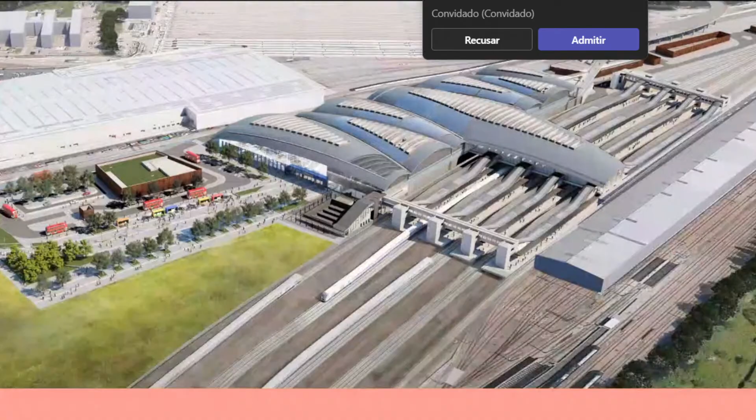So these are the topics that I'm going to be covering today. I'm going to do a brief introduction about myself, my academic background, and my career. I'm going to talk a bit about WSP, the company I've been working for the past year and a half, and then we're going to look into HS2 as a whole, the HS2 project within the United Kingdom, and then we're going to focus more particularly on the project that I've been working on, HS2 Old Oak Common. The two main aspects we're going to talk about within the project are the structural design—how we've completed the design, which is not complete, it's like 99% complete at the moment.

We're still finishing up the design, but it's pretty much there and we're already building it. The second point is the construction of this great project, which is already on site, and it's something I've been following with my work on a weekly basis.

And then at the end we're going to have a Q&A session. So if anybody has any questions, I would ask them to maybe write them down on a piece of paper and then ask me at the end of the presentation.

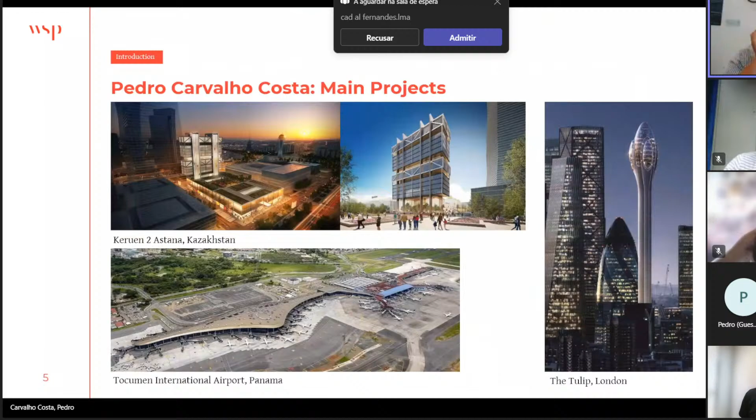So these are just some of the projects I've worked on in the past. I can't show you all of them because some are still confidential and some are still being constructed, so I cannot share pictures for contractual reasons, but these are the ones that I can.

So my first project was a project in Kazakhstan, in Astana. It was a shopping mall with an office tower with quite interesting design features. First of all, the office tower with hanging composite floors from the top of the concrete core, and also you can see in the image on the top left there's a garden on top of the shopping mall.

The loads we had to consider to design the shopping mall were quite substantial, and there were some interesting features like precast and post-tension concrete as well. But the biggest challenge on this project was the temperature design, because Astana is the second capital in the world with the largest temperature range. So we had to account for those temperatures. That was quite an interesting project.

My second project was Tocumen International Airport, a very, very long structure in a seismic area. That was quite a different challenge from the first one, but probably one of the projects I liked most to work on, and I've learned a lot on this one.

The last one I can show you from my period at Foster & Partners was the Tulip, which I made a presentation about with Forum Civil a couple of years ago. It's not going to be built because the government vetoed its construction, for sustainability reasons. I can't comment on that, but what I can say is that from a structural point of view, it was quite an interesting project to work on.

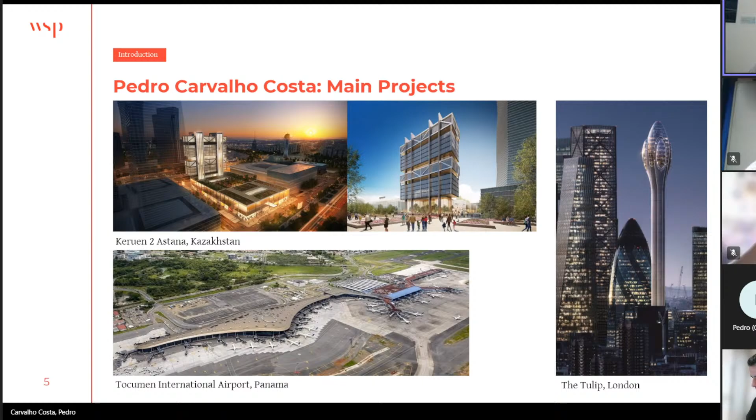But that's enough about me. Let's move forward. So WSP is the company I'm working for at the moment.

WSP is one of the leading engineering consultancies around the world. We work in all sorts of fields related to engineering - airports, buildings, landscape architecture, transportation, infrastructure, all sorts of things you can think of in the built environment. In terms of the UK business, we're divided into 5 different departments: planning advisory, transport infrastructure, strategic advisory, property and buildings, and water energy.

In the last few years, due to the transition to net zero, the most important one I'd like to highlight here is property and buildings, because that's where I work. Although in my current project, since it's a railway project, it's kind of a joint venture between property and buildings and transport and infrastructure, so we work with some members from that department as well.

Some of WSP's projects in the last few years include the Shard, which you might be aware of - the tallest building in London. Other projects include the Zayed National Museum, quite an interesting structure, which I've put here purposefully because I actually worked on this project very briefly when I was still at Foster's. That was actually my first direct contact with WSP from a professional standpoint.

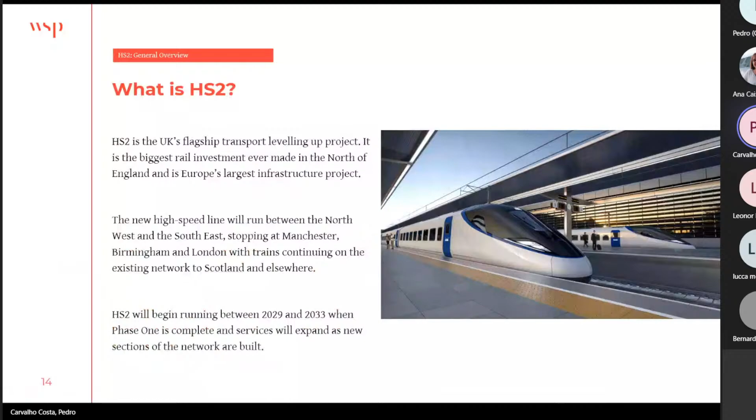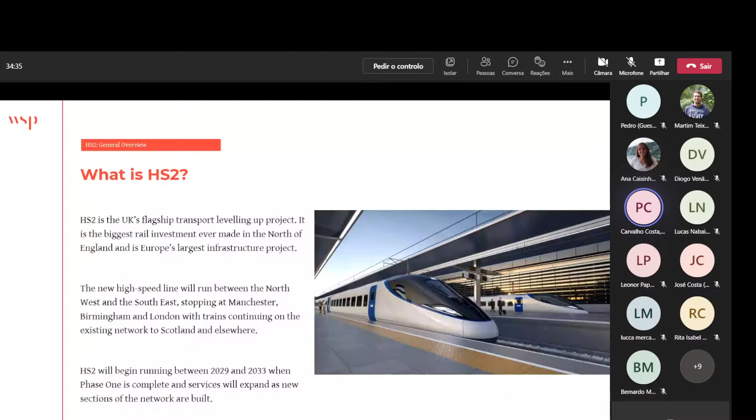It's a new high-speed line that will run between the North West and the South East of the country, connecting major UK cities like Manchester, Birmingham, and London. Its connection to the other railway networks in the UK will allow passengers to travel further afield to Scotland, Wales, and other places in the country.

The services from HS2 are currently expected to start running between 2029 and 2033, and that's when phase 1, the initial stage of the project, is meant to be concluded.

The project as a whole is divided into different stages. We've got phase 1, which is the connection between London, Birmingham, and the West Midlands—the Midlands being an area of England between the north and south, kind of the center of England. Then phase 2A is an extension of that line further afield to Crewe, which is sort of halfway between Birmingham and Manchester. Manchester is where phase 2B of High Speed 2 will be concluded.

Then there is HS2 East, which includes a connection to the east part of the Midlands, with potential future services to Yorkshire, Leeds, and other cities around that area. And then we've got the connection to the Northern Powerhouse Rail, which will allow connections of the HS2 services to the north of the country, to Scotland, and further afield.

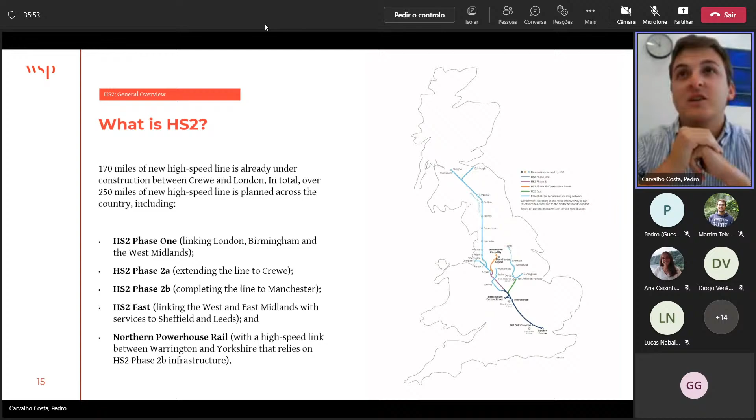So in total, it's going to be around 250 miles of new high-speed line.

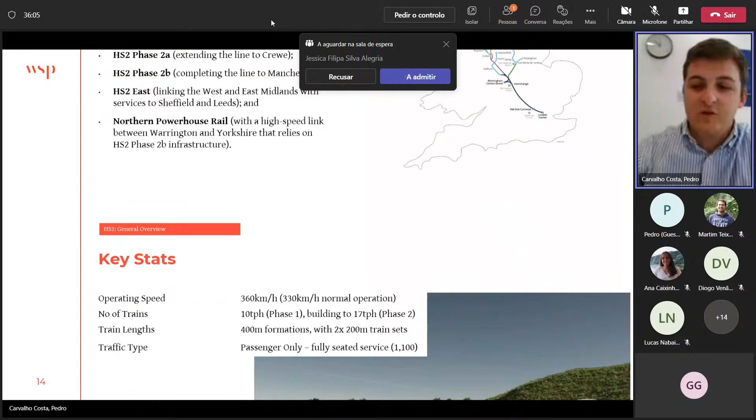In terms of some key stats of the project, the operating speed of trains will be about 360 kilometers per hour. Just to give you an idea, normal trains run at about 230 kilometers per hour—so it's almost double the speed. That's why it's high speed.

In terms of trains per hour, phase 1 of the project has been designed to have 10 trains per hour, so that's roughly 1 train every 6 minutes, and that number is going to be bumped up to 17 trains per hour, almost double, on phase 2.

In terms of train lengths, we're talking about trains that are 400 meters long, which can be divided into 2 sets of trains, with the front bits of the train separating if necessary. This is something that actually happens a lot in the UK—a train does part of a journey, and when it reaches a certain station, the train divides into 2, and the halves separate. So that's something that may happen on HS2, and it's been covered in the design.

In terms of traffic type, we're talking about passenger only, so there's not going to be any freight or goods being transported on this train. It's only going to be passenger trains.

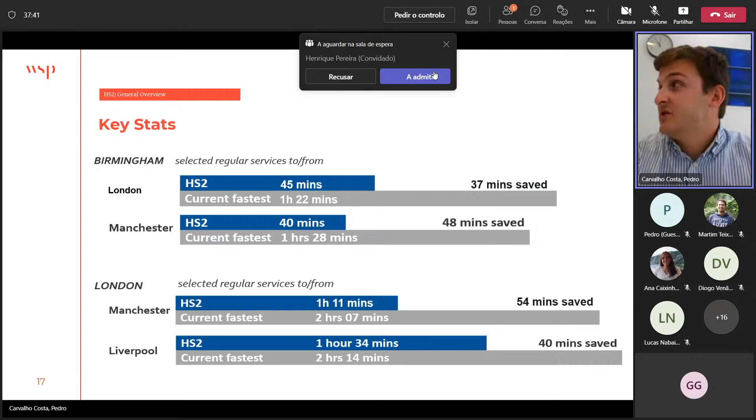In terms of times, that's obviously the first benefit people think of straight away when you talk about high-speed rail. That's very important, but it's not the only benefit from HS2, and it might not even be the biggest one in my personal opinion—however, it's important to talk about it. You can see on screen that we're basically halving the distances between London and Birmingham, and Birmingham and Manchester. The savings are very considerable, and having those major UK cities connected with the length of time shortened is going to allow people to, for example, commute between these cities, which will be very beneficial to the country as a whole.

In the United Kingdom, what tends to happen—similar to what happens a bit in Portugal—is all the services and economic activities are centered in the capital, London, the same way it happens in Lisbon. One of the ideas behind HS2 is that we're going to level up and boost the economy elsewhere in the country.

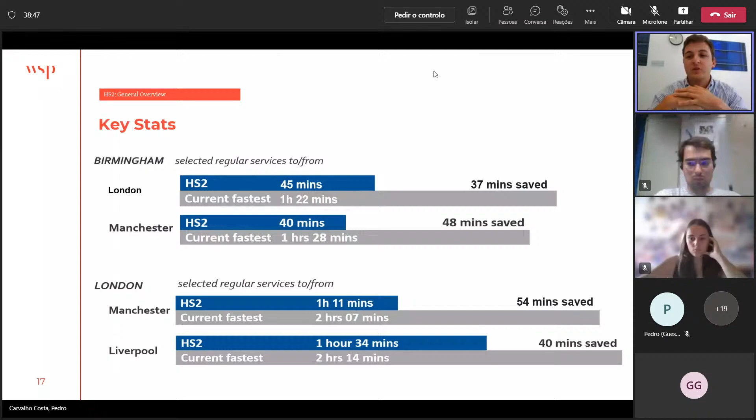By having good connections, good infrastructure and public transport connections between these cities in the UK, we're going to help other cities develop further and have economic growth as well. So, as I said, this is the immediate first benefit of HS2, connecting these two cities, but in my view there's a greater one.

It's not just about traveling fast, but also about releasing infrastructure for other services. At the moment we have trains running from London to Birmingham, and those trains are occupying space on the current infrastructure. If we're able to move those services away and put them on a different line, a high-speed line that provides a better service for people traveling between those two cities, then we're going to have spare capacity on the original network.

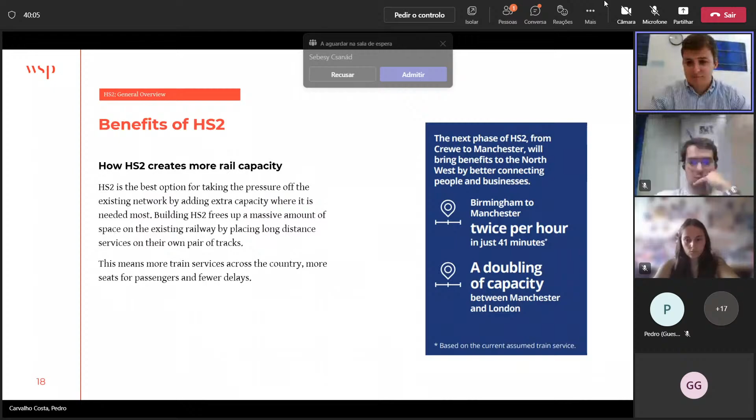That will allow for the creation of further normal railway services in those areas. So cities and little towns between London and Birmingham will be able to have more railway services. There's a boost in terms of public transport, and that's going to eventually generate economic growth, benefiting those cities and towns because they will have much better connections and other benefits as well. So, in my view, that's actually one of the main advantages of HS2.

Obviously all this connectivity will generate growth, and as I said a few slides ago, it's going to help level up the country, boosting the economy of these local cities and towns, which will all of a sudden have more services and be more interconnected with other parts of the United Kingdom.

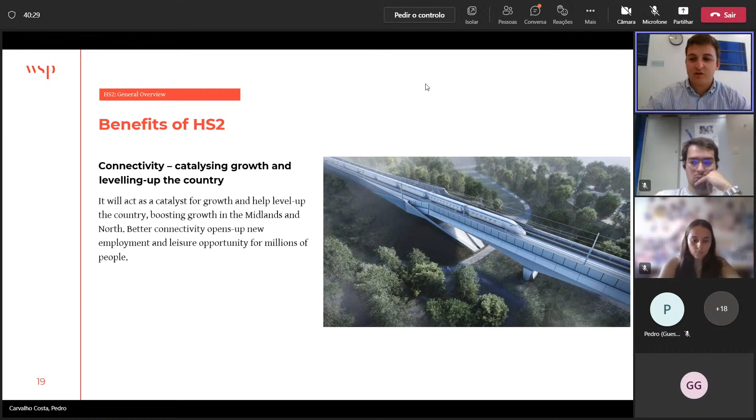And while we're building this massive infrastructure project, the net zero transition is on our mind. It's one of our main goals for this project. All our carbon emissions will be offset. We're planning to have net zero construction and operation from 2035.

One thing already happening at construction sites across the United Kingdom is that we're planning to have sites running diesel-free. For example, usually the cranes on site are operated by diesel, but at Old Oak Common we're already not using diesel-operated cranes, they're electrical. So there's a big push from WSP and HS2 to make this project as environmentally friendly as possible.

And obviously, last but not least, this is going to be a boost for the British economy because it's a massive infrastructure project, and it's going to need a lot of people to work on it. There's going to be lots of need for suppliers. We're talking about the creation of 27,000 jobs, directly or indirectly related to HS2.

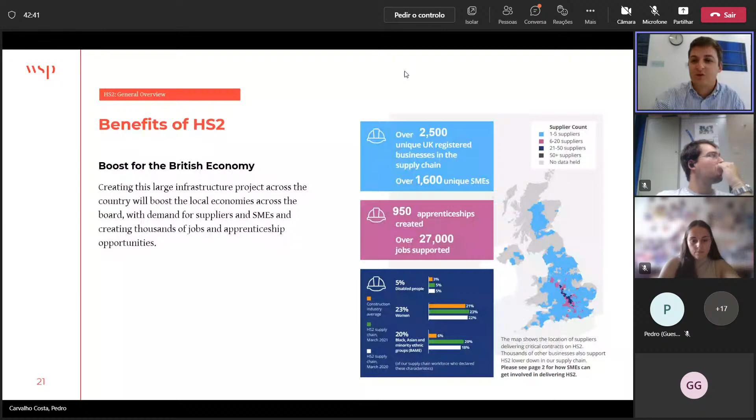You can see on the map that the concentration of suppliers is much larger along the length of the project, where you have the HS2 line. But you can also see there are suppliers all across the country benefiting from this project, even in places like Scotland. So that's also going to help level up the country by generating more economic activity in different areas, not just in London.

So I think that's pretty much it for HS2 from a macro point of view. Let's look now more into a micro point of view, into HS2 Old Oak Common.

Old Oak Common is going to be one of the two London stations of HS2, and it's going to be part of HS2 until London Euston is completed. Old Oak Common will be the terminus of the high-speed line. London Euston is a bit more complicated project because it's an expansion of an existing station with some retrofit, and it's in the city center, so it's a bit more complicated and will only be completed further afield.

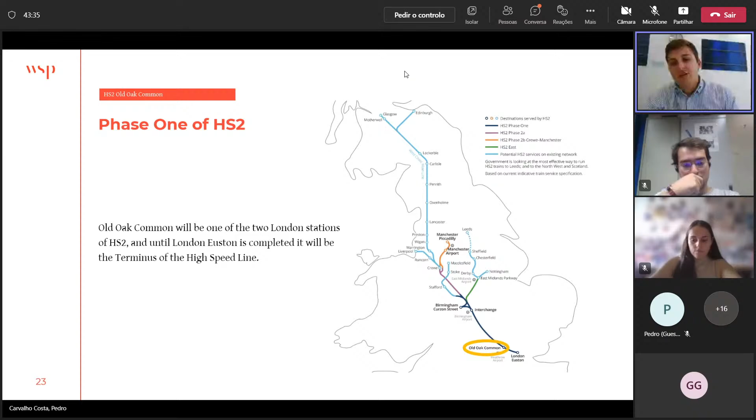So in the initial stage, when HS2 services start running on the line, Old Oak Common will be the final station in London.

This area of town is called Old Oak Common. A common is sort of a park - this used to be an area of town that was a park. The difference between a common and a park is that a park usually has fences around it. A common is just a field with grass, and it's a bit less formal.

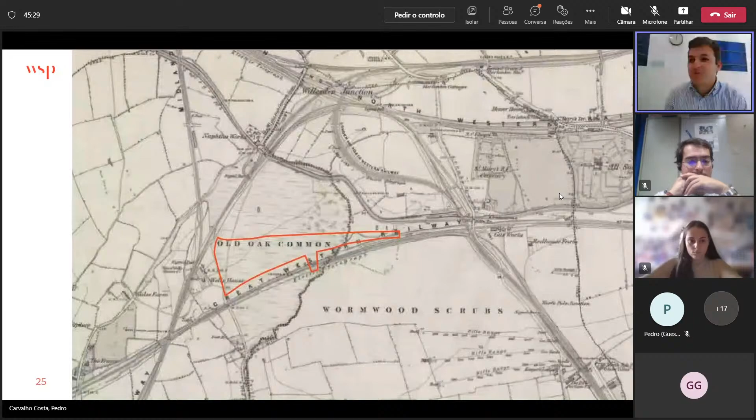This is a very old map, but that's where the station got its name, and where this area gets its name from. This area is known to have had a lot of industrial activity and industrial warehouses, as you can see on screen now. So this was the site before the project started to be constructed, and the industrial aspect of the project had some impact on the design from an architectural point of view.

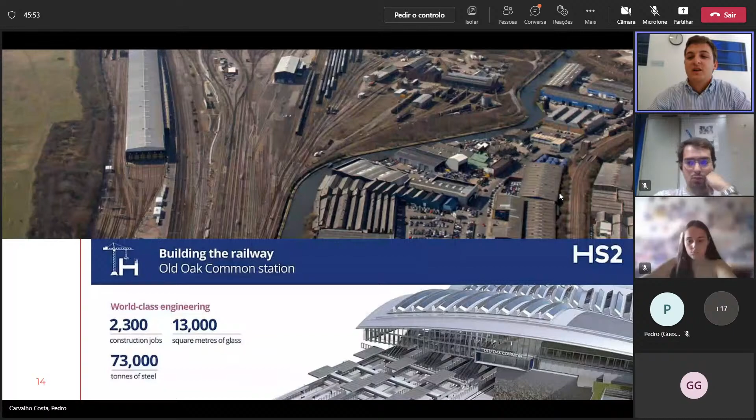In terms of numbers, it's going to create directly 2,300 jobs. It's a lot of materials involved - we're talking about 73,000 tons of steel, 13,000 square meters of glass.

But the most important numbers are probably the ones on the bottom left of the screen. The project is going to have 14 platforms - 6 of them underground, which will be HS services below the surface, and the remaining ones will be Great Western Mainline services and Crossrail services. Perhaps the most important number here is 250,000 passengers a day - that's a massive number. It's like 2.5% of the population of Portugal every day being on the train station - that's just massive.

Another number is that we have about 70 trains per hour - more than one train a minute leaving the station, at peak times. That just shows you how much transport connectivity will be generated by this project.

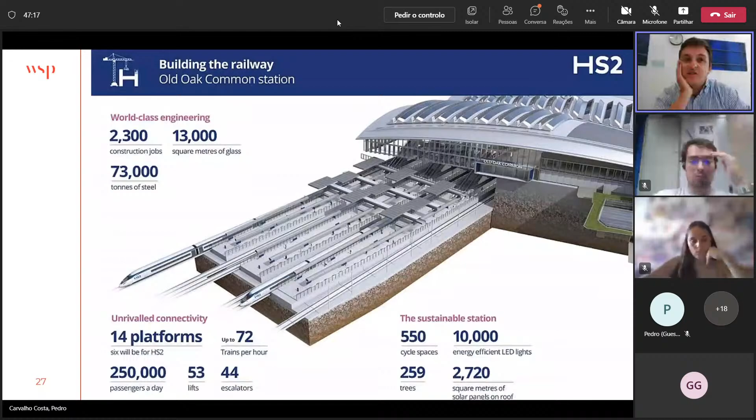In terms of the design bits of the project, we can divide it into 4 parts. We have the HS2 station in the center, we've got the GWML - which stands for Great Western Main Line - that's the station for the normal trains, the ones that are not high speed, on the surface level. We've got the urban realm, highlighted in green, which is the area right next to the actual station building on the surface, where there's going to be parks and areas that people can hang out in and use while waiting for the train or commuting to the station - generally a nice area to be in.

And below all of that, we've got what we call the box, which basically accounts for the majority of the project. The box is the underground structure that allows for the tunnels where the HS2 services are going to come from - it makes the connection between those tunnels and the actual station itself. That's the largest part of this project.

If we cut a cross section through the station, you can see on the left we've got the HS2 box with the trains running underneath, at what we call the B2 level, with the roof of the station above. On the other side of the image, you can see the GWML, also covered by the same steel roof. In the middle, we have something called the shared accommodation building - the name gives it away a bit - a building that's shared with the station.

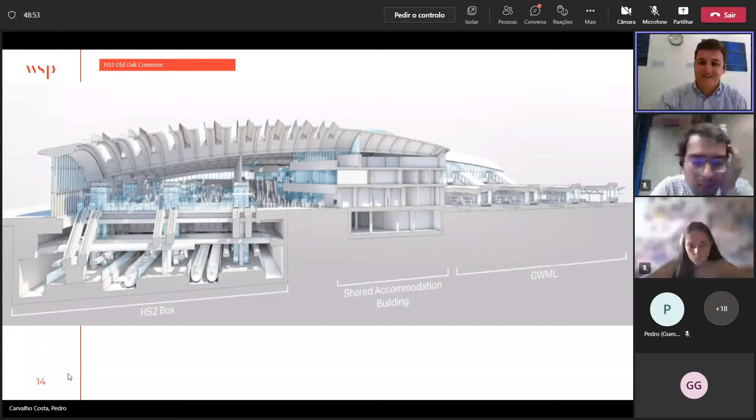In terms of the box itself, in the office we usually call it the Burj Khalifa on its side, because it's as long as the Burj Khalifa is tall. It's a massive part of the project - about 840 meters long, 65 meters wide and 16 meters deep. About 40,000 tons of reinforcement, massive loads of concrete - 300,000 cubic meters of concrete - and more than 800,000 cubic meters of excavation. The box is monumental, it's just huge. Once I show you pictures of the site, you'll understand the scale of it.

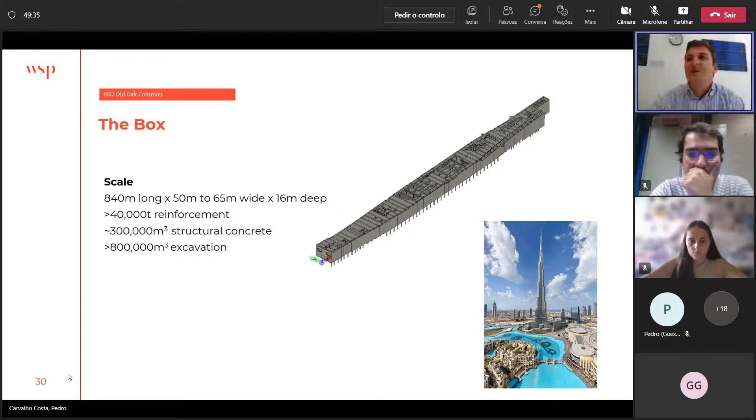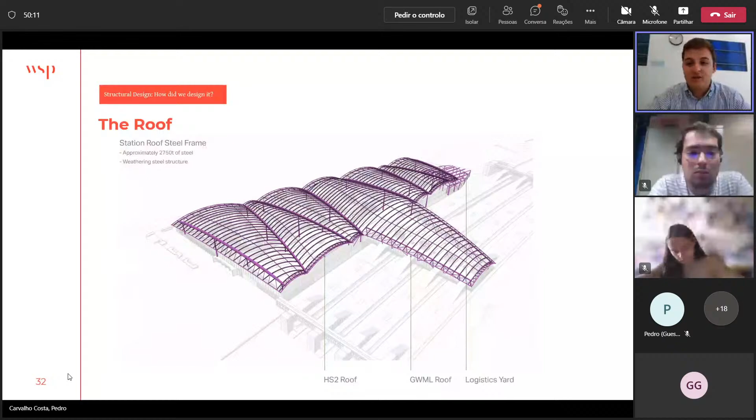I'm going to start by the roof, from top to bottom. The roof is a steel structure that frames all above the HS2 station and the Great Western Main Line station. It weighs about 2,750 tons of steel, and this is all weathering steel. I'm going to touch base on what weathering steel is in a few slides from now.

So this is how the roof looks like from above. In terms of structural systems, the main idea is that the secondary beams are arch beams. We've got fabricated steel boxes with hangers and the tie cable. So it's a tied arch, the secondary beams, and these are then supported by also fabricated box sections that are the primary beams.

If we look at it in more detail, this is how the architects envisaged it to look like, quite pleasant to the eye. You can see the secondary beams framing and being connected to the primary beams, with the tie cables being attached to the bottom of the secondary beams, and then how this connects into the columns.

And I've put that image of that bridge over there just to remind myself to talk about weathering steel. All the roof is going to be built with weathering steel. Weathering steel is a sort of steel that has that aspect, as you can see on that bridge - it looks like it's rusty, a bit orangey and brown, but that's actually on purpose.

Weathering steel is a special kind of steel that kind of rusts, and the way it weathers itself, that actual layer of what we think is rust is actually protecting the structure from corrosion. For a big project like this, that has a design life of 120 years, it's important to future-proof it and minimize impacts of elements like corrosion and other similar things.

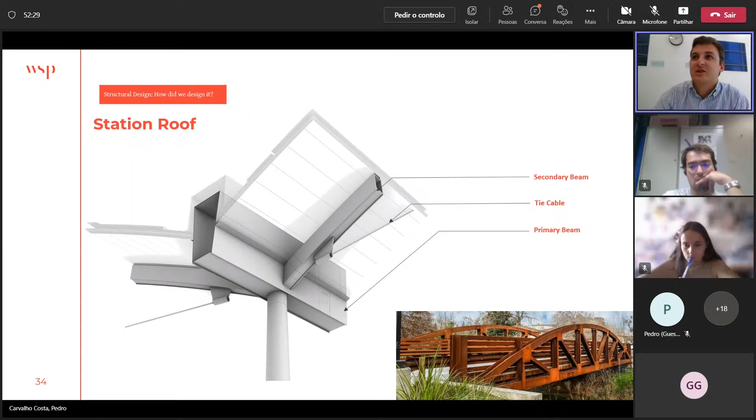So obviously, the roof is going to cover a large area, and there's going to be humidity, and having good corrosion protection is very important. That's why we went with weathering steel, because in the end it's going to be much cheaper for the client, since this is a type of steel that actually protects itself. In terms of maintenance, we're decreasing the costs over the length of 120 years by a lot. Those are major savings, and it's also structurally sound and beneficial to use this material.

From a structural point of view, I've spoken about the secondary beams, which are tied arch systems. These run east to west, and are supported on the primary beams, which are also fabricated box sections, which run normally from north to south.

In terms of lateral point of view, the United Kingdom is not a seismic area, although one of the HS2 requirements for this and the rest of the HS2 line is to design for earthquake. So even though the accelerations are very, very small, especially compared to a seismic area like Portugal, we still have to design for these loads. Our lateral system is much different from what you'd see in a seismic project, and most of my previous projects were seismic, so I was a bit shocked by what we can do in countries that are not seismic.

In any case, we've got a mix of fixed columns at the front. We've got diagonal bracing at the back, at the back of the shared accommodation building, and we've got some stability cables around the west line. And we've got a wind truss running all around the perimeter of the roof, so that it helps distribute those loads to the vertical elements.

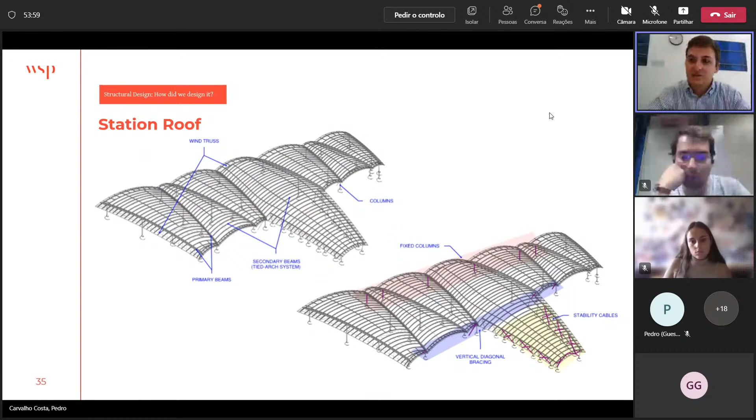So this is how our SAP model looked like. We've used SAP and GSA to design the station - to design the members and the connections, and to estimate the movement due to wind and other forces on the station. This is how it looks like - it's a very complex model. It takes a few minutes to run, and has lots of load cases, and it was quite an adventure to go through this model.

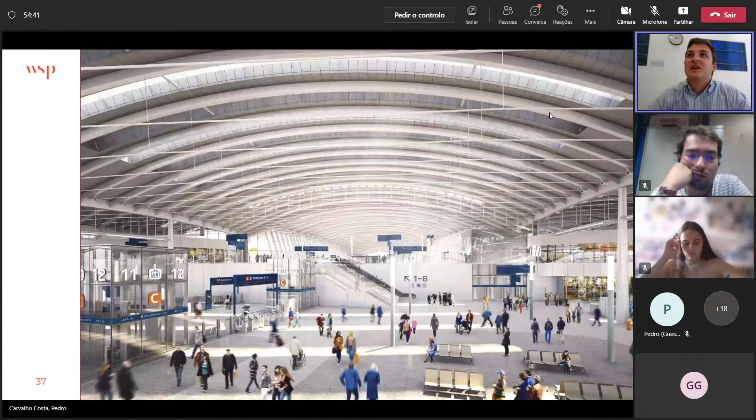And this is how the project is going to look like once it's built. So you can see this is the main concourse area. You can see the cables and the hangers on the roof.

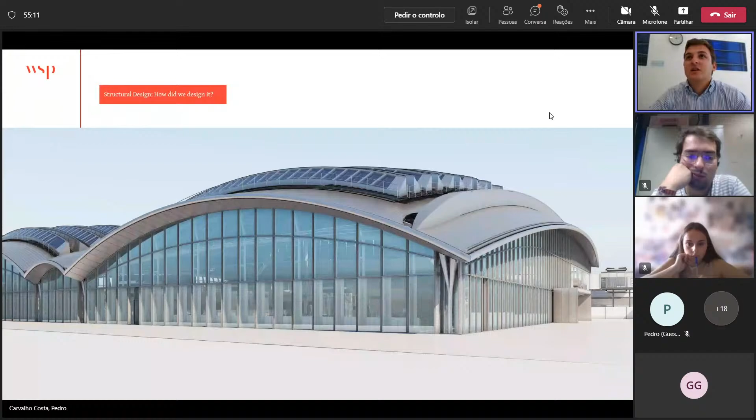And this is how it's going to look from the outside. So the roof on its own is not just a feat of engineering from a structural point of view, but it was also a job of integration between structure and other disciplines.

We've got roof lights that will allow the station to have natural light. We have integration with natural ventilation, so that's also going to benefit the station. And we have also solar panels and photovoltaic panels. So all this integration of these features into the roof helps the station be more sustainability friendly, and they're going to decrease the carbon emissions of the station. If it has solar panels, that's reducing its carbon footprint and reducing its energy necessities.

So there was a big push on the roof so that it could be as sustainably friendly as possible, and all the design has been optimized as much as possible to reduce the amount of steelwork used. Obviously having a system that relies on tied arches helps a lot, because it's quite an efficient system from a structural point of view.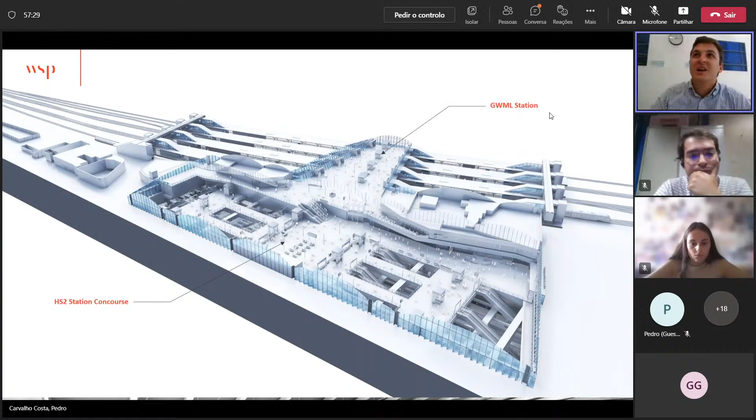And then if you keep going down, I think this picture helps make a smoother transition between the roof and the box. So below the roof we've got the box structure, which is a concrete structure, and you can see the massive concrete elements, the props and the columns as well, integrated with the escalators.

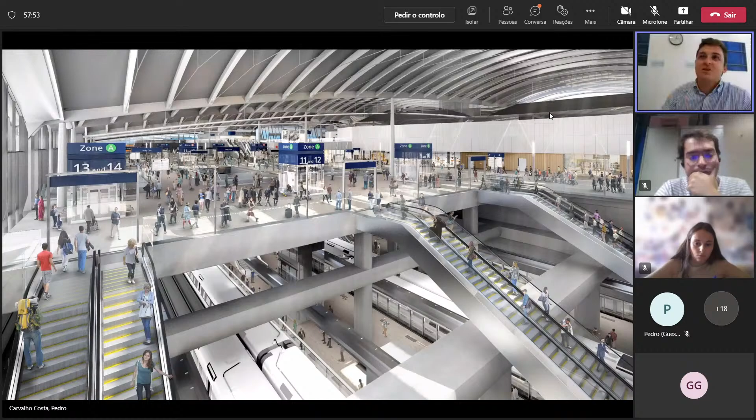And this is how it looks if we do a cross section. You can see the several roof arches going from east to west, and you can see the trains that will run underneath the station at the lower level of the box.

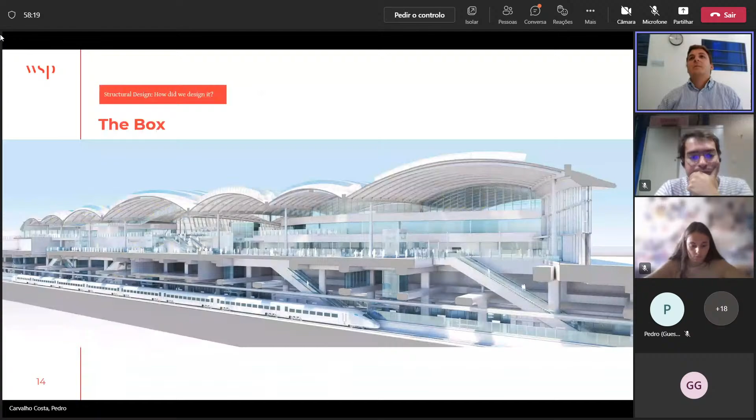This is how it looks in the box. At the intermediate level we've got our props that stop the wall from tilting in. They help with the stability of the box. We've got that, and although it's not very visible in this image, you can see where the train is - that's the so-called platform level.

Looking at this image, one thing important to highlight is how the props will be working in compression, because they're helping the diaphragm wall resist the soil lateral loads. That's why these members look so big - they need to take massive lateral loads due to the soil lateral pressures.

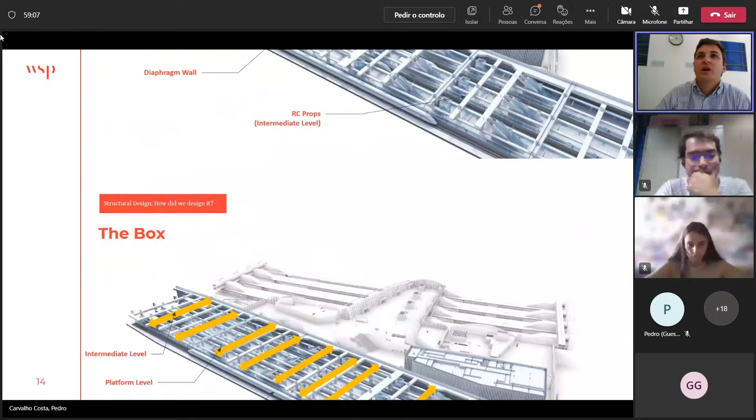If we look at it in section, this is how it looks. Starting from the left, we've got the diaphragm walls that run all the way to the bottom, below even the base slab. We've got the base slab, the walling beams, which I'll touch on a bit later, and the props, both at the intermediate level and the ground floor level.

We also have some structures on the urban realm - lightweight structures, steel, sometimes a bit of concrete as well, but we've got those supported on the ground floor slabs. Then at the center of this picture, you can see where the platform level is, where people will take their HS2 trains. We've also got the plunge columns and the piles underneath the columns.

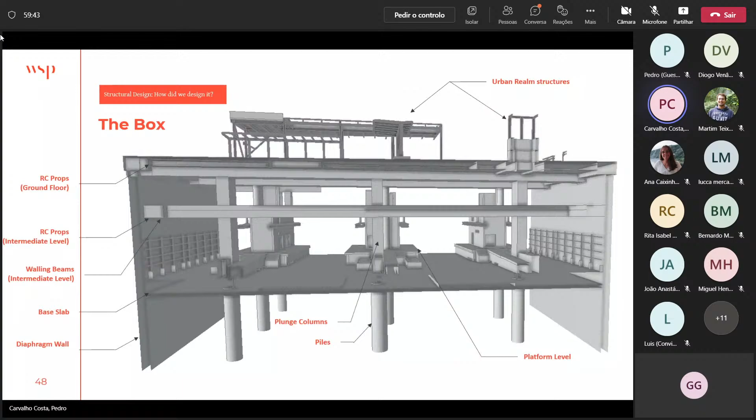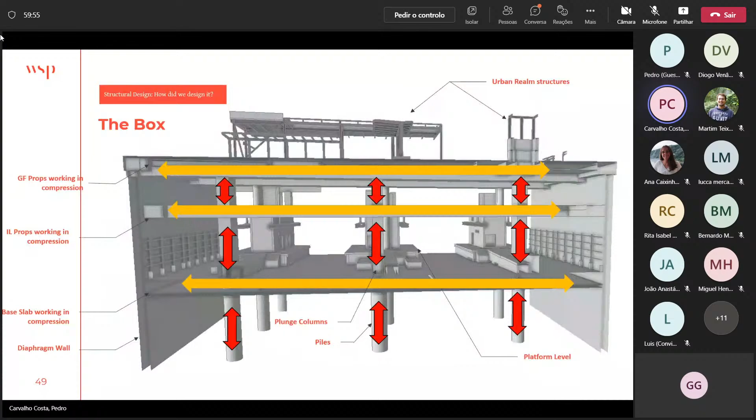In terms of structural forces involved, there's a lot of compression. We've got lateral loads coming from the soil on either side of the diaphragm wall, and what helps keep the station together are the props at ground floor and intermediate level, which work heavily in compression. The base slab also works both in compression and flexure, because of the pressure due to uplift from underground water, and also heave. There's also a lot of compression in the columns and piles, because these are very big spans, so the axial forces in those columns are quite significant. So there's a lot of compression involved in the design of this box.

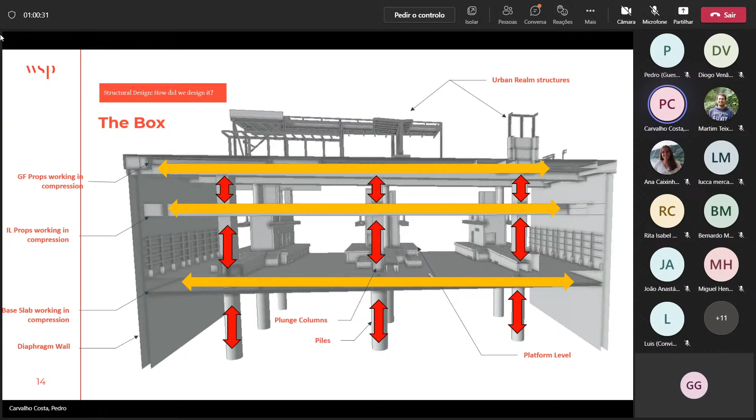Looking at it from the intermediate level, it's essentially the same principle, but the way we distribute the force throughout the props is by having walling beams at the intermediate level, and at the ground floor level what we call the capping beams. These beams work horizontally, sideways, and help distribute the soil loads from the diaphragm wall to the different props. Otherwise, without any walling beams, we would probably have punching shear problems in the connection between the props and the diaphragm wall. By having the walling beams, we make it stiffer, so movement is reduced, and we distribute the forces better, which helps optimize the design.

This is going to be exposed concrete. The architect put a lot of emphasis on exposing the structure in the station, and that's quite good from a structural engineer's point of view. I like to work with architects who like to show how the structure works and showcase these elements. If these elements were hidden, people would not understand how big they are, or how much input went into the design of this building. So it's always pleasant to see exposed structure.

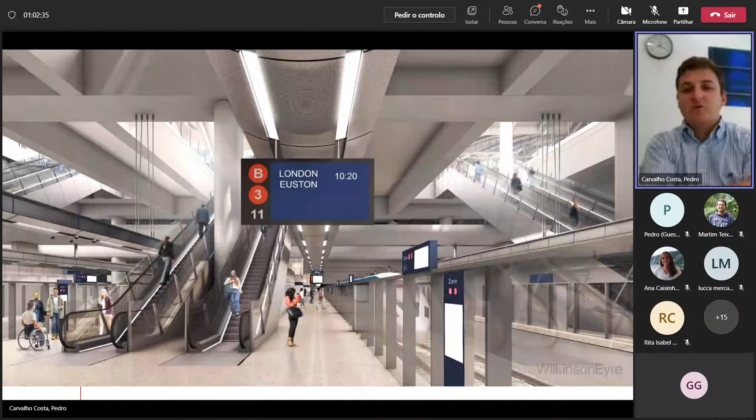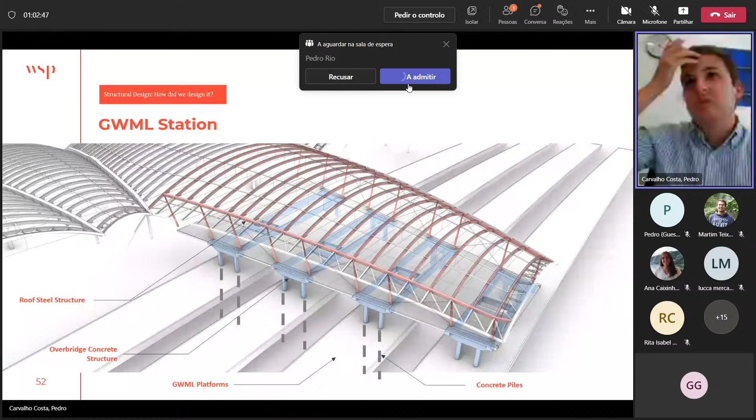Coming back to the surface level, just to talk a few minutes about the Great Western Mainline Station. As I said before, the roof covers the Great Western Mainline Station as well, and it's the same kind of structure. There are no movement joints on the roof, and this is supported on a concrete structure at level 1. This structure is ground bearing, resting on piles, so there's no basement on this part of the station. It's all at ground level, and the concrete piles support what we call the overbridge, and the platforms will also be supported on piles, but those will be at ground floor level as well.

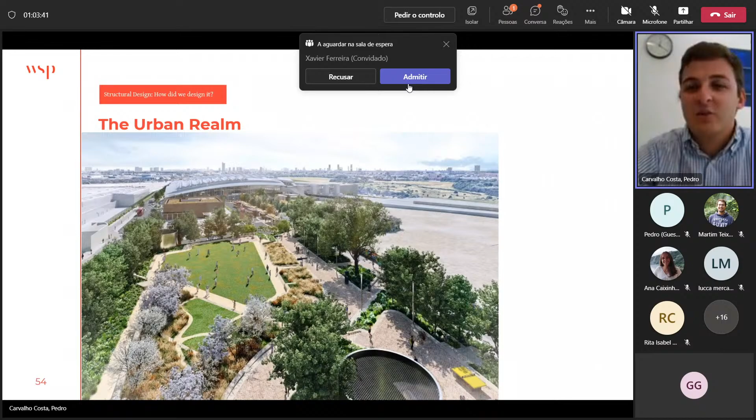The last bit of the design I want to talk about is the urban realm, the area right next to the main station building. You can see in this image the area with parks and trees, and you can even see a ping pong table in the bottom corner. This is going to be a pleasant area to be, whether you live nearby and are just passing by, or you're waiting for a train to depart, you can just wait outside, if the weather allows, which in the UK is not that common, but you know.

So the urban realm in terms of structure is divided into several buildings.

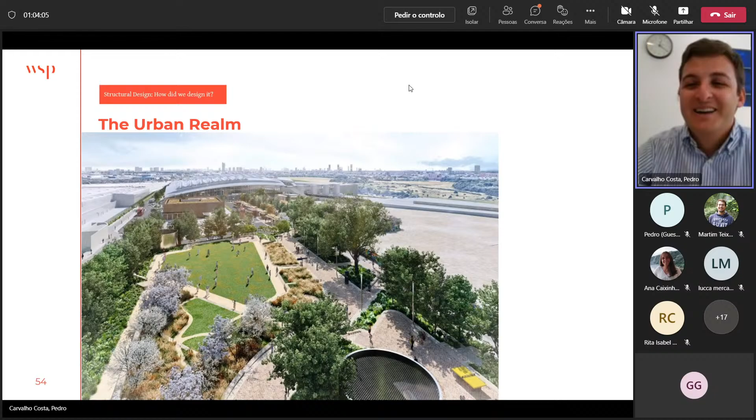These are very simple structures, typically steelwork and some bits of concrete, so there's not much story here on the structural design of them. But the reason I wanted to highlight these is because although the structural design was not very complicated, the structural models seem quite simple.

The key challenge of these buildings was the integration with other disciplines. When I was a student studying structural engineering, you really focus on that - not criticizing it, we need to know all about forces, stresses and bending moments. But once we've mastered that, we need to understand our structure does not work on its own; we need to take into account other disciplines as well, and that needs to be incorporated into the design. Students should be aware that in the future, once doing structural design, they will face challenges not just from a structural point of view, but from integrating with other disciplines.

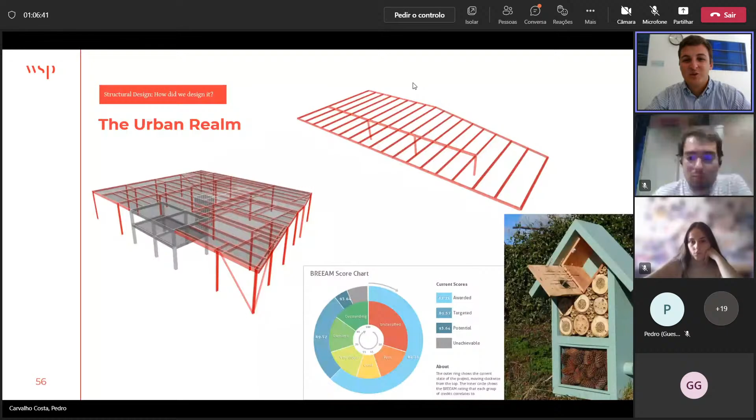That's an insect hotel. I had never heard about insect hotels before working on this project, but that's a feature that's going to be included in the roof of the east and west cores, helping species, namely insects, keep their habitats in this area so they're not kicked out and lose their habitat. There's a big focus on being environmentally friendly, with proportionate features in the project that help the species and help the project be more green.

Overall, this is going to boost our BREEAM score. BREEAM is a UK based criteria that evaluates buildings' performance on sustainability factors. So all these things - inclusive design and sustainability - will boost our BREEAM score. Currently we're ranking around excellent in the BREEAM score, but we still aim to achieve outstanding in the near future as the design progresses.

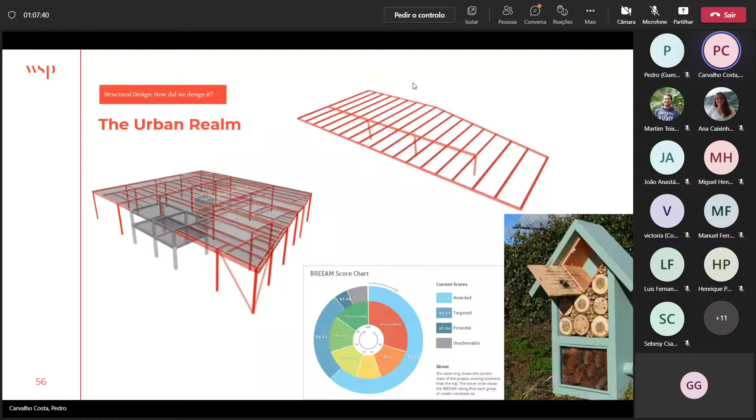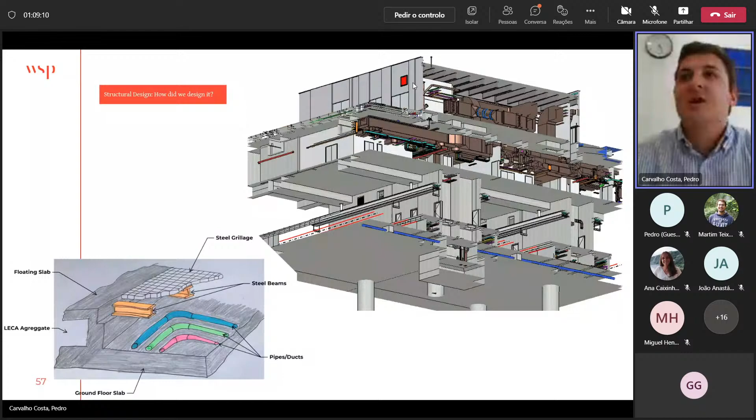That's going to make everyone's job easier, and it's going to benefit the project as well. So that's just a message that I wanted to convey - something that we're not exposed to in our education, but it's something you will be exposed to if you become a structural engineer in the future. So I think that concludes the design part, and I've spoken too much already. So I'm going to pass the voice to one of my colleagues from HS2.

At Old Oak Common in West London, construction has started on what will be a major station in the UK. The construction of the station will be carried out in 3 main phases.

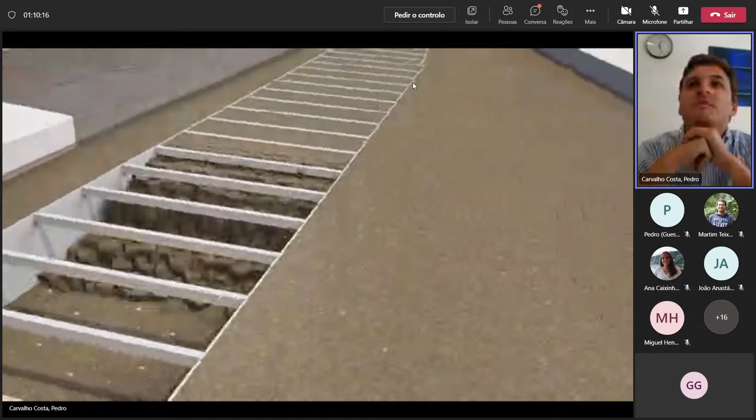In the first phase, the station build, this is where 6 high-speed platforms will be located, serving the Midlands and the North. To build it, a 1.8 kilometre underground concrete wall will be installed around the perimeter of the underground box. 160 steel columns will be installed to form the box and support the structure. Concrete beams will be cast on top, tying all the elements together to form a large concrete structure. This will then allow the earth inside to be removed safely. The amount of earth taken out of the box will be enough to fill nearly 300 Olympic-sized swimming pools.

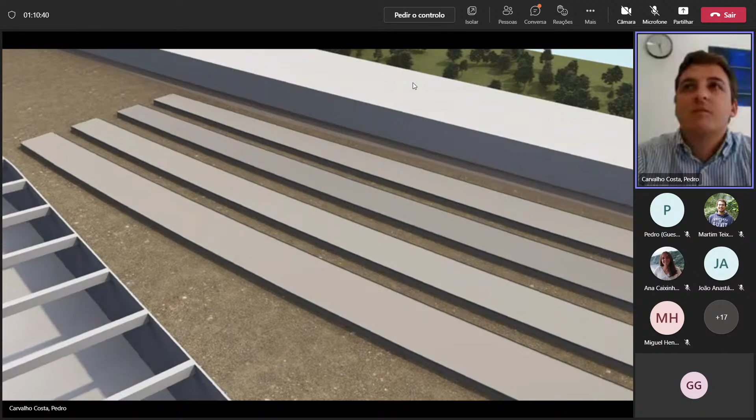In the second phase, as the excavation of the underground box is taking place, work on the 8 overground platforms will begin. Over 1,600 concrete piles will be installed into the ground, on which the station's superstructure and overground platforms will sit. These platforms will then allow the Elizabeth Line and Great Western Main Line services to stop at the station.

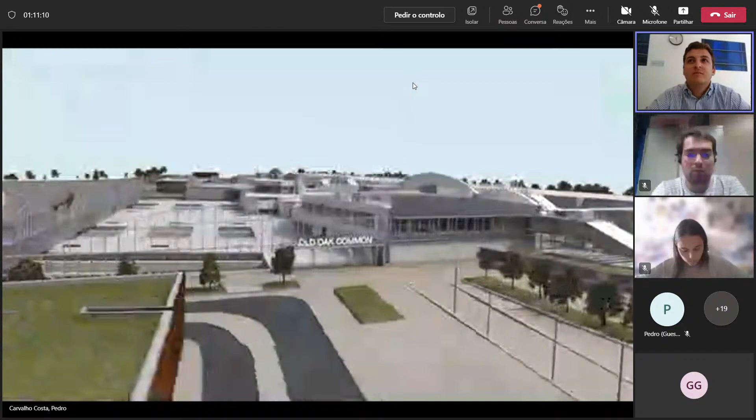As the high-speed platforms and the overground platforms are being completed, the HS2 station and the surrounding urban area is built - the third and final stage. The main element of the station will be its immense roof, covering the 14 platforms, designed to minimise the use of materials and allow as much light as possible, which reduces the carbon impact of the station.

To further boost its environmental credentials, the roof will be covered with solar panels, generating a supply of renewable energy for the station. This curved design of the roof brings together 3 different railways into one unified building, creating a common experience for passengers, turning it into one super hub station. With over 250,000 passengers using the station every day, Old Oak Common will be the best connected and largest new-build station in the UK, making it one of the country's most vital transport hubs and a catalyst for economic regeneration for the area and the rest of the UK.

So I think that was a bit of an introduction on the construction side. As my colleague - not really my colleague, HS2 is the client of the project - but what the woman in the video was talking about, she spoke about top-down construction. I thought I'd go through a couple of slides to highlight this, because some of you may have already had TCE, Tecnologias de Construção de Edifícios, with Professor Brito, I think in the 4th year of the master's. I can't remember exactly, but you're probably going to learn this there if you haven't already.

Top-down construction is a very efficient method of constructing underground buildings. To showcase this, as an example from our station, we started by installing the diaphragm walls, as you've seen on the video. Then we installed the plunge columns - these are steel columns that are pressed into the ground. And then we start by building the ground floor structure. As we build the ground floor structure, we're able to excavate and create the space required to build the foundation.

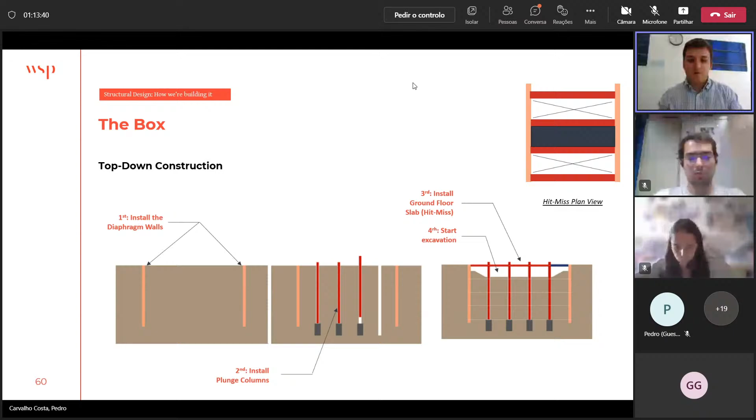We do that by following a hit and miss plan, as you can see on the top right corner of the screen. A hit and miss plan basically means that between every 2 props, we're going to have a slab, but we're not going to cast all the slabs straight away. We leave empty voids so that a digger can go there and remove the earth from the ground, and that's done sequentially, so we can then start building the floors below.

And if we keep doing that, we can keep digging and building structure, making sure everything is stable and the structure is in equilibrium. We can also start building the upper floors at the same time that we are finishing the excavation on the bottom part of the station, which is quite an effective way of building these sorts of projects, and it's one of its major benefits.

It's time saving, because we can build the underground part of the structure as well as the superstructure at the same time. And for a project of this magnitude, time saving is obviously money saving a lot. So it was, I think, a very good choice from the construction side.

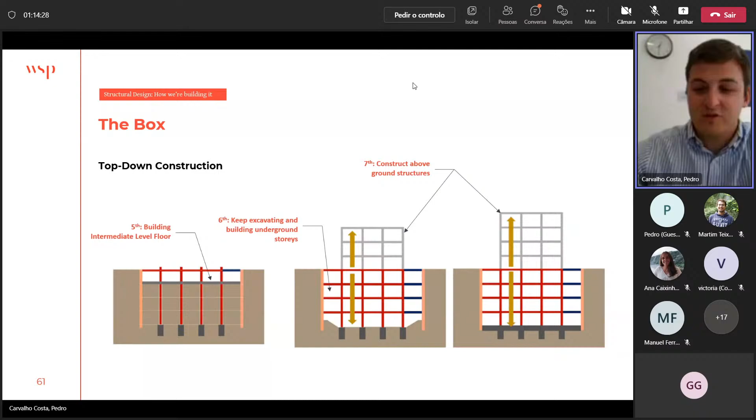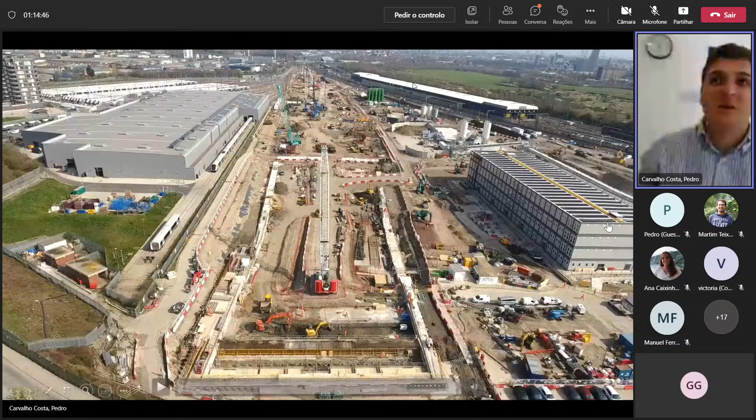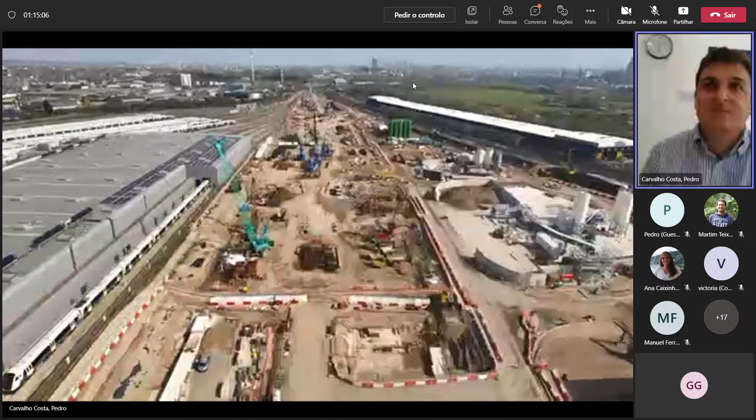So these are drone images taken actually during the summer. This is how large the site looks. What's going on at the same time, different areas, so it's a really hectic site.

And then the next one, the east part of the box. So for you guys to have a feel for how long the project is, there's a bridge coming in at the center top of the screen, you can see some trusses. If you can see my cursor on screen, there's a bridge there, that's where the overground line passes, the train that I take to go to site to work.

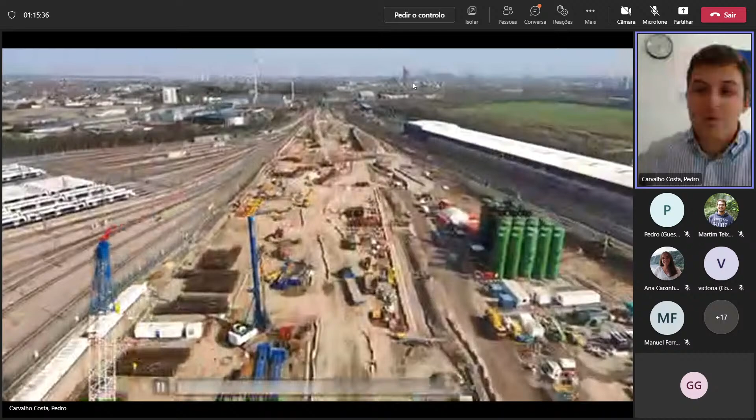And this is the closest I've been to the east box, the east part of the project. From the site office I can't see it, but when I'm commuting I can actually see it better from the train than from being on site. So that shows you how large the project and the site actually is.

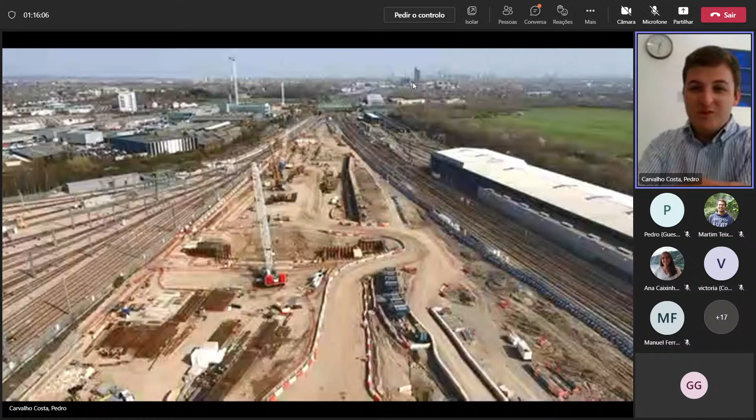Yeah, and then a few pictures from site. So this was a few weeks ago, from the cranes and the reinforcement cage, you can see the company installing all the bars and the amount of rebars that we have in those massive structural elements.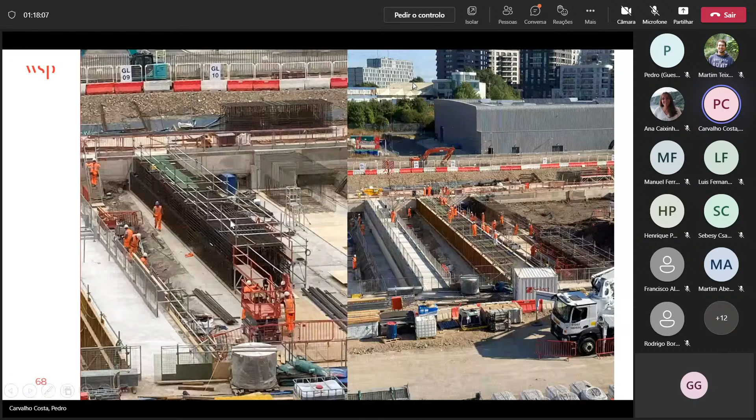And I think that's it, yeah, I think that's it.

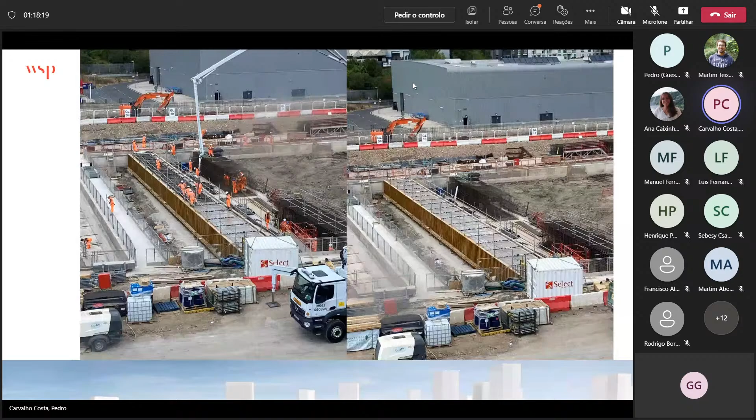Before we go on to questions, there's another video that I want to share with you just to conclude the presentation, to give you a kind of a takeaway from this presentation.

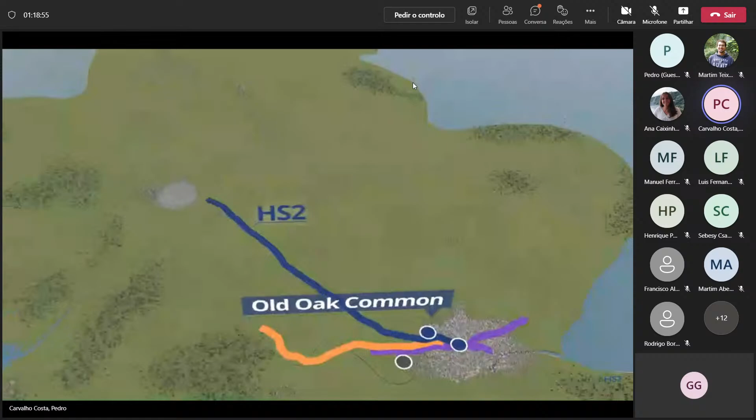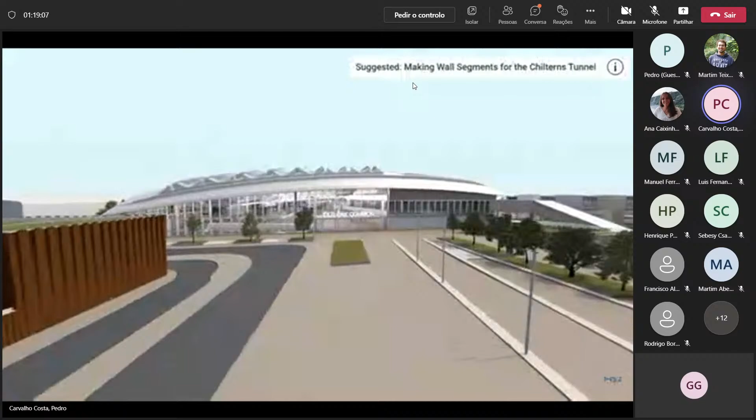HS2's Old Oak Common Station will be one of the best connected and largest new build railway stations in the UK, making it one of the country's most vital transport hubs and a catalyst for economic regeneration. Located in West London, three major rail lines meet here: HS2, the Elizabeth Line or Crossrail, and the Great Western Main Line. We've designed the station to make it as easy as possible for passengers to change trains and make their connections to all points, north, south, east and west.

As you enter from the vast public space in front of the station, you'll be struck by the open concourse and the sweeping roof. The roof design creates a sense of space and calm, and allows passengers to find their way around the station easily, reducing stress on their journey.

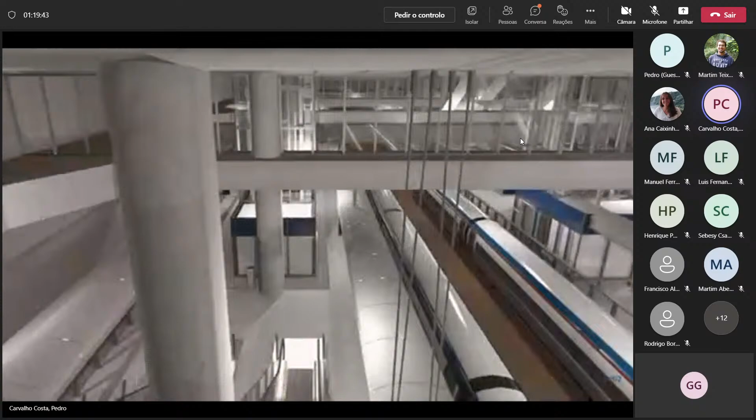For passengers taking high-speed trains, that means heading 15 metres below ground to the 6 high-speed platforms. Here, passengers can take trains to the Midlands or change onto their onward journeys to London, Heathrow, or connections to Wales and the southwest. Whether you're switching lines or leaving the station, you'll head back up the escalators to the ground level concourse.

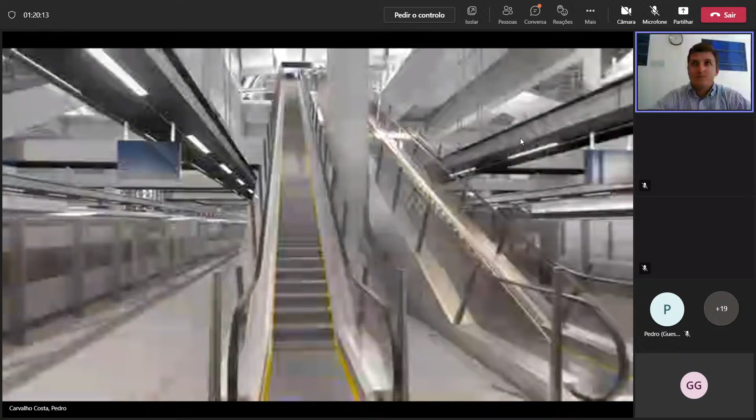We've designed this to maximise passenger flow.

From here, you'll make your way to the 8 platforms serving the Elizabeth Line, Great Western Services and Heathrow Express. At these platforms, you'll catch trains to central London, Canary Wharf and Heathrow, and longer distance services to Bristol, Exeter and Plymouth, as well as Cardiff and Swansea. This unrivaled connectivity at Old Oak Common Station will play a huge part in rebalancing the UK economy, bringing Britain closer together and connecting our major cities.

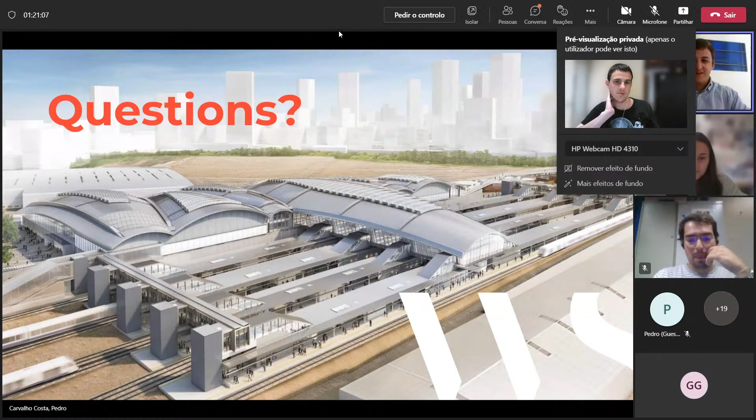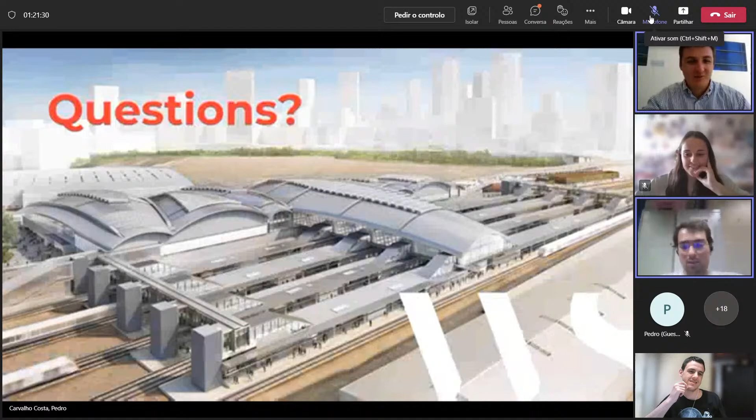Okay, if you wanna type it in the chat or just ask me. I don't know if there's anyone that's not a Portuguese speaker, so if you guys want to do the questions in Portuguese, I'm happy to do so as well. I think there are 2 students from abroad.

My question is, is there any way, or is it possible to extend the line through all Europe? Like a high-speed line that is specific to England? So, no, it's the same. I can't remember the English term for it now, but it's the same as a high-speed one.

Actually, that's an interesting question, because when the idea of HS2 first came about, the idea was that it would be a continuation of HS1. You would leave the HS1 service at one station and then that train could continue, or move to another train in the same station. But that proved to be very expensive, because the terminus of HS1 is in the city center, and tunnels of the magnitude we need for HS2 would be really expensive to build in the city center of London. That's why the terminus was moved to London Euston, because there was an opportunity there to do it in a more economical way, but that's also why Euston is taking a bit more time to be completed.

There was an initial idea to have those interconnected, but that has been dropped due to cost issues. In any case, the terminus of HS1 is only about 5 minutes' walk from London Euston, so it's not going to take you a lot of time to change between those two trains.

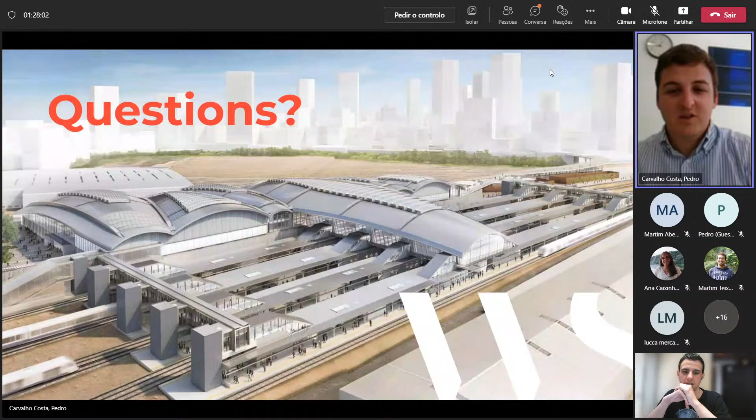Yeah, I think I've touched base on that before. Let me see, I have a slide with that actually. Let me just try to find it. So yeah, this slide, you can see here.

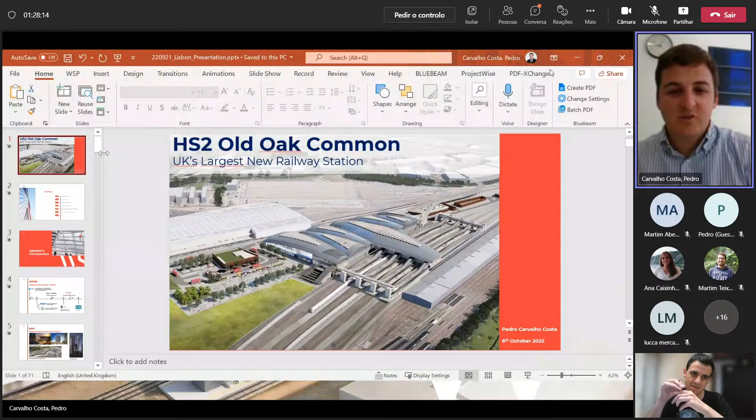The HS2 high-speed services will be the ones underground. We have 6 platforms of HS2 services on the left-hand side here, and then all the services above the surface on the ground level, so the Great Western Mainline services and the Crossrail services. These are normal trains, not high-speed. They will be connected on the ground surface, and all of these will be part of the same station, so the roof structure covers the whole thing and it's only one station.

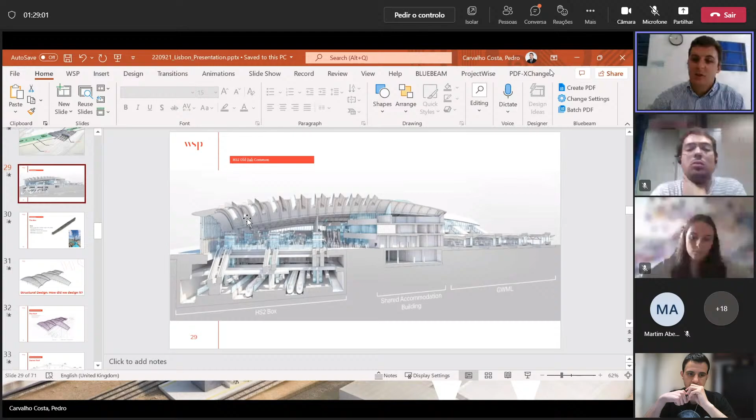So we have 14 platforms, only 6 are high-speed trains, the remaining ones will be normal railways. Although it's not planned yet, there are plans for the future to do a connection to the overground services, the London Overground. The underground is obviously the underground train, the overground is kind of surface. So there's plans for the future for smaller stations to be built in the vicinity, and they could be connected to Old Oak Common station.

So in the construction, you took into account the future and the possibility of expansion, right? The necessity of building other types of transport infrastructures.

Well, yeah, yes, there are some. We've taken that into account in the design. There are parts of the project that are future-proofed. We call it day 1 and day 2. Day 1 is what we're building now, but for particular parts of the station that could have future connections, we have a day 2 scenario where we have different loads, sometimes higher, sometimes not so much. But in our design, we take the biggest loads that we need to account for. So yes, the station is future-proofed for expansion as well.